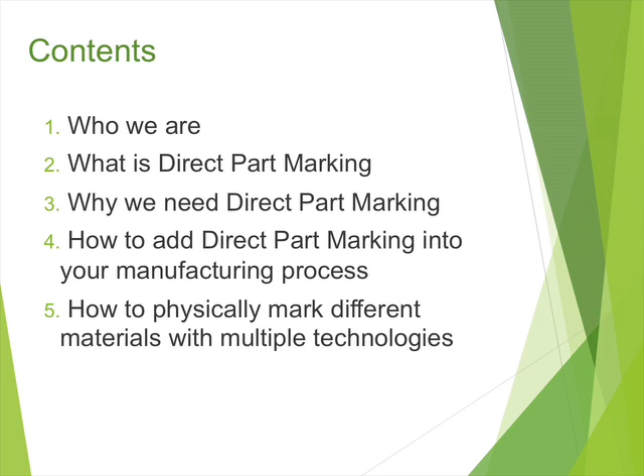Okay, so who is Gravotech? Why are we qualified to educate you on the best practices in marking and traceability? Well, whether you know it or not, every day, everywhere, Gravotech is in your life. You can find us in the engraving on your jewelry, ID numbers in your phone, the VIN number marked on your car, serial numbers on medical devices, and even implants inside someone's body.

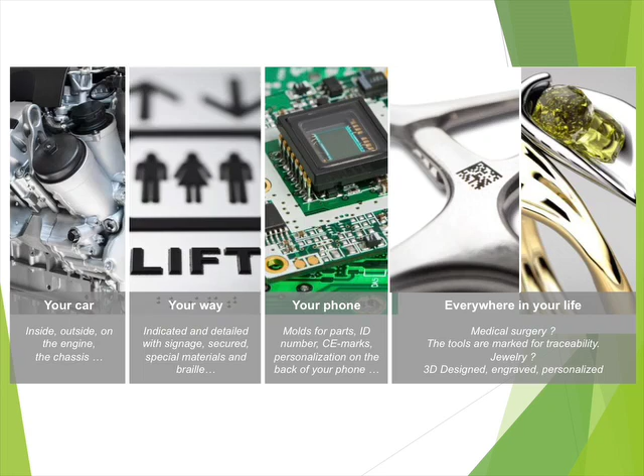How do we do this? Well, Gravotech is built on three outstanding brands. Type 3 is our software brand focusing on 3D artistic CAD/CAM solutions, like designers working on 3D modeling designs for anything from engine parts to jewelry. Gravograph products are focused on rotary engraving machines and benchtop engraving and marking lasers. And Technifor branded products focus on dot-peen, scribing, and the latest laser technologies in the manufacturing market.

These are the solutions most people listening today will be interested in. With over 1,000 employees, Gravotech has offices and distributors in over 100 countries and 3 manufacturing sites in Duluth, Georgia, outside of Atlanta, Troyes, France, near Paris, and Shanghai, China.

So if you're working with a contract manufacturer in another country, you can actually work with Gravotech where you are and design the best marking solution for your product. Then have your overseas factory work with their local Gravotech office to install the marking solution exactly to your specifications.

For example, years ago when I was a product manager for a healthcare manufacturer and distributor, I was working with contract manufacturers in China. We went back and forth with samples and they just couldn't get the right permanent marking solution that we needed. At the time, I didn't know about Gravotech.

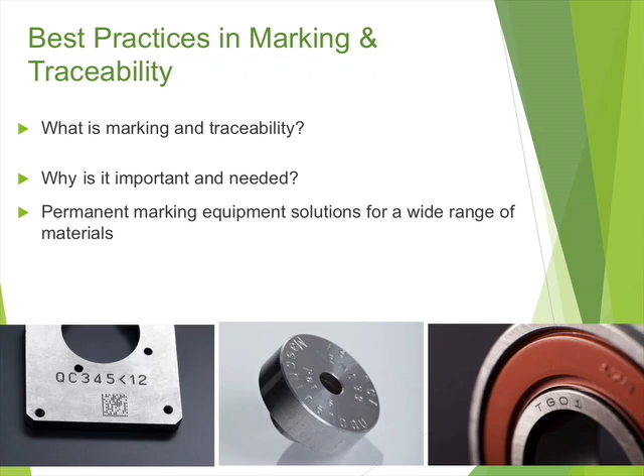Tracking goods can be a tricky business. With component after component being used to make products, how do you keep track of everything? With direct part marking. Direct part marking is the method of marking products directly on the surface during or after the manufacturing process.

Not all methods are permanent and may need to be remarked, costing time and money. For over 78 years, we've tested lots of methods and we recommend 4 technologies: laser, rotary, dot-peen, and scribing.

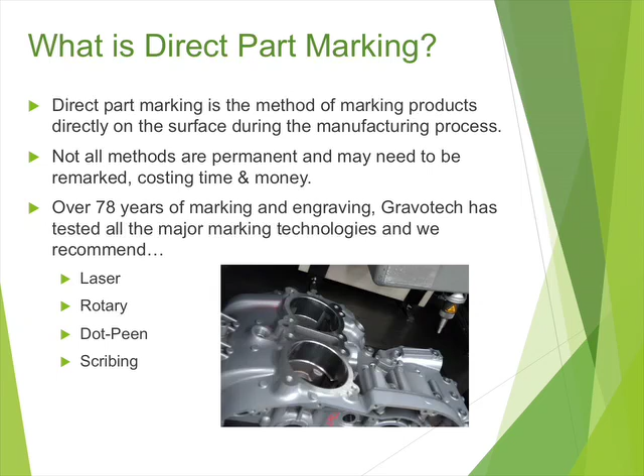Here are some examples of direct part marking. As you can see, the marks are permanently etched into the surface of the part without damaging the surface or affecting the working functionality of the part.

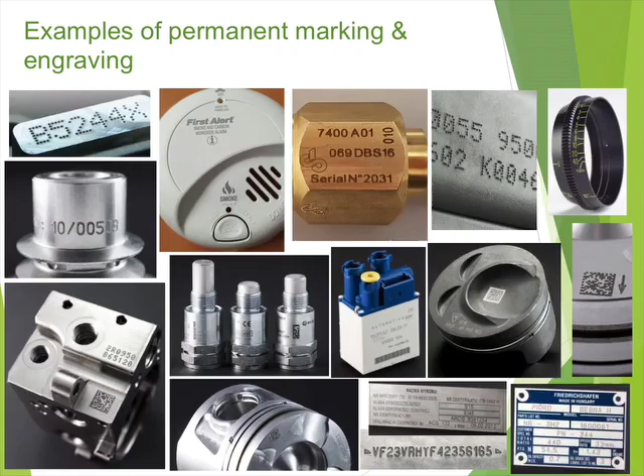Now you may be thinking, direct part marking is nice, but why would I need to spend time and resources marking products? My products are top quality and never fail. That may be true, however, it is driven by much more.

Other industries, like automotive and aerospace, carry enormous amounts of liability that they need to track each and every part to its origin in case of safety malfunctions. Branding and identification allow a company to forever mark their product with a name, logo, date, and more that cannot be removed. Traceability is also benefited by direct part marking because in-process setup and inventory can all be monitored electronically.

All costs are reduced by being able to precisely pinpoint warranty issues and recalls. All of this boils down to providing a competitive advantage for your company.

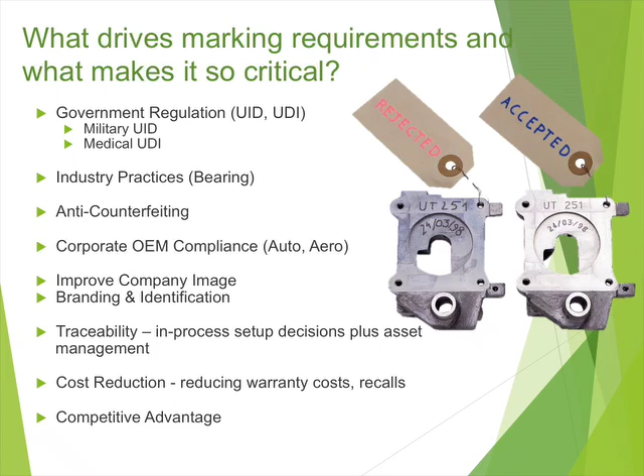Cost reduction is a major consideration for manufacturers to implement marking and traceability. U.S. manufacturers spend more than $25 billion every year on product warranties. Automotive warranty costs alone exceed $9 billion per year.

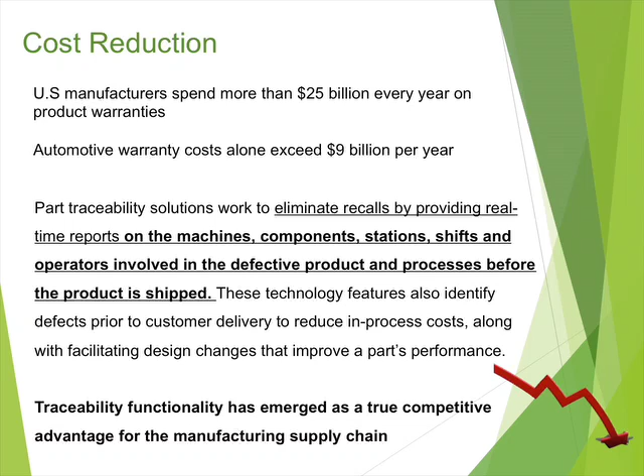Part traceability solutions work to eliminate recalls by providing real-time reports on the machines, components, stations, shifts, and operators involved in the defective product and processes before the product is shipped. This allows for earlier design changes to improve parts performance and reduce in-process costs. Traceability functionality has emerged as a true competitive advantage for the manufacturing supply chain.

There are, of course, both short-term and long-term benefits for implementing marking and traceability. The short-term benefit is to identify products affected by the defect after customer delivery to minimize recall costs. This minimizes the number of products that must be recalled when a manufacturing flaw is found by identifying only the specific serial numbers that were built with the faulty component or material or by the faulty process.

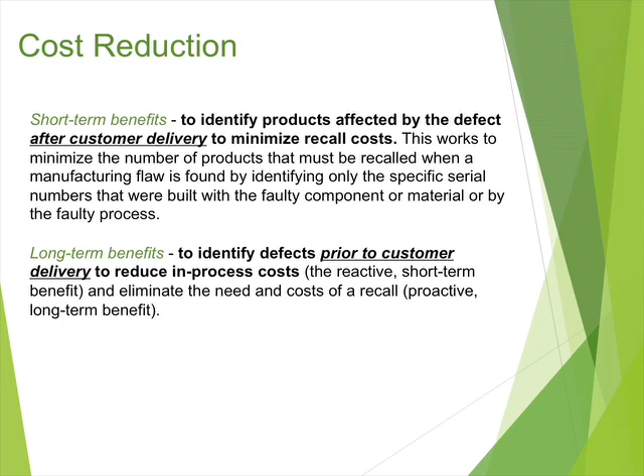The long-term benefit is to identify defects prior to customer delivery and reduce in-process costs and eliminate the need and cost of a recall.

Liability. We live in a litigious society. Liability for manufacturers is a huge consideration. Consumers, customers, government agencies, and courts expect higher quality standards and levels of corporate responsibility. It is up to the manufacturer and supply chain to track their processes and business information so critical safety-related decisions and operations related to warranty issues can be properly analyzed.

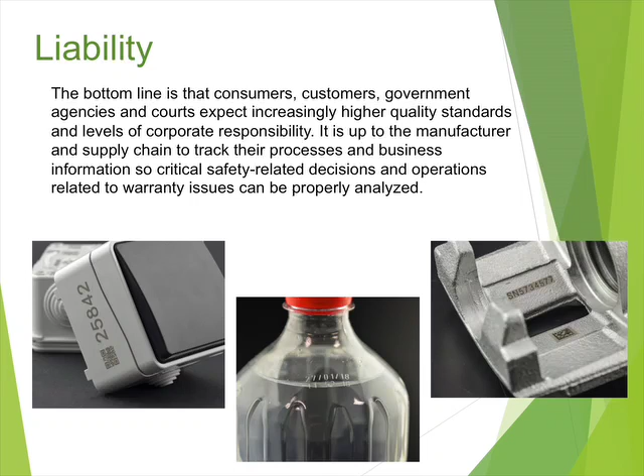If you've ever been involved with a product liability lawsuit, you know the first thing your company's attorney is going to ask you is, did we or someone else make it? How do we know? That leads to another concern for manufacturers: counterfeiting.

Marking and traceability can lower the liability for manufacturers by having a clear and concise history of the part. Manufacturers can add small nuances to their marked parts to easily prove a fake mark from a real mark. Again, this helps you and your attorney answer who made it and if it's yours.

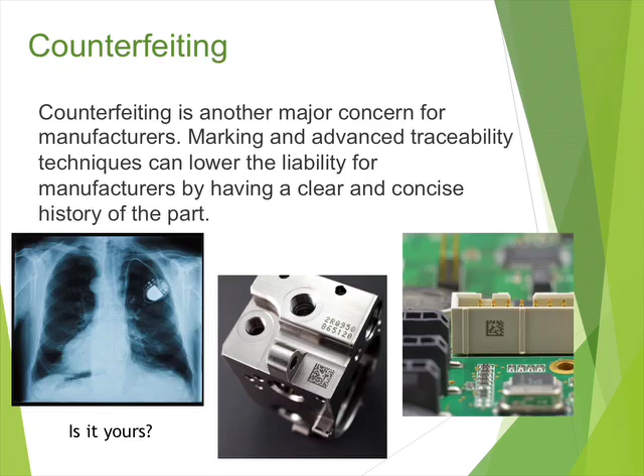In case you didn't know it, $1.77 trillion is spent on counterfeit parts such as brake pads, steering linkages, valves, and more. Here is a counterfeiting example for spark plugs.

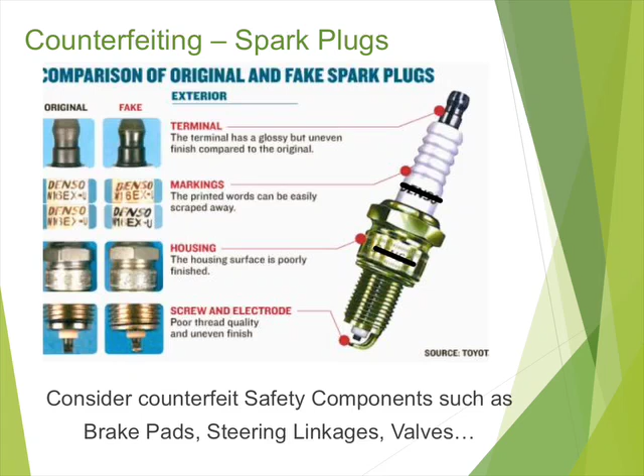A counterfeiter can make a product that looks like yours but is completely inferior and fails. Only permanent direct part marking can prove the fake from the real and make it harder to copy.

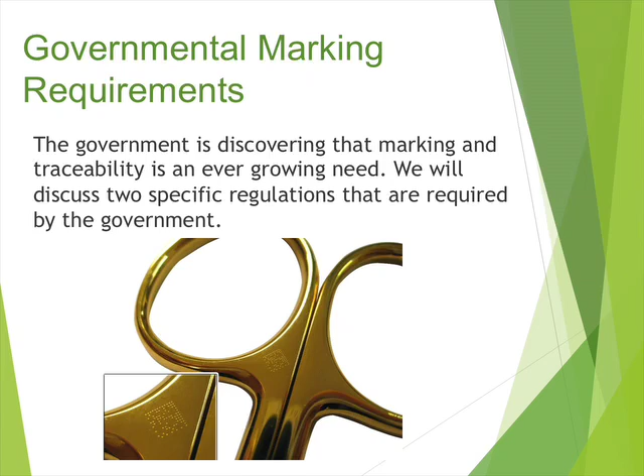Now let's talk about government marking requirements. The government is discovering that marking and traceability is an ever-growing need. We will discuss two specific regulations that are required by the government. The U.S. military requires UID marking. Companies need a partner with extensive knowledge about marking and traceability requirements.

Along with tracking goods for the military, the U.S. government has implemented unique device identification for all medical devices being used in the U.S. For years, there has not been a good system for tracking medical devices.

In 2006, the maker of a surgical clip called Hem-o-lok issued an urgent recall notice warning doctors to stop using the fasteners on living kidney donors. It said the clips could dislodge in their bodies with serious, even life-threatening consequences. Not everyone got the message. A surgeon in Brooklyn used one of the clips to tie off Michael King's renal artery when he donated a kidney to his ailing wife. 12 hours later, the clip popped off. King bled to death internally. He was only 29.

Situations like this can and are being prevented thanks to the new traceability system. By September 24, 2020, all devices will have both human and machine readable codes permanently marked on their surface.

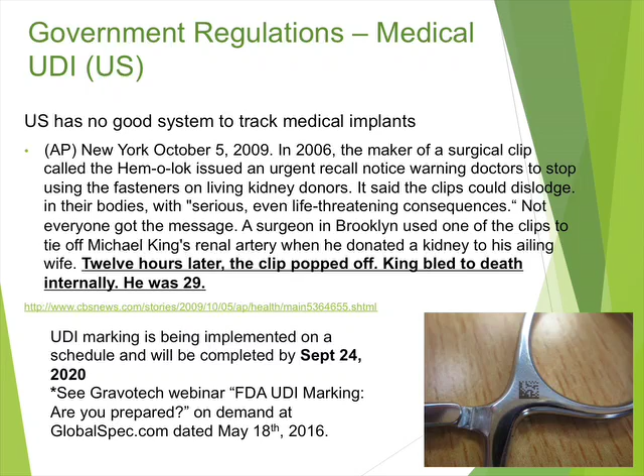So, to integrate or not to integrate? Now that we know why permanent marking is a best practice in manufacturing, let's discuss how it gets done. How do you add marking solutions into your manufacturing facility? Integrate or not to integrate?

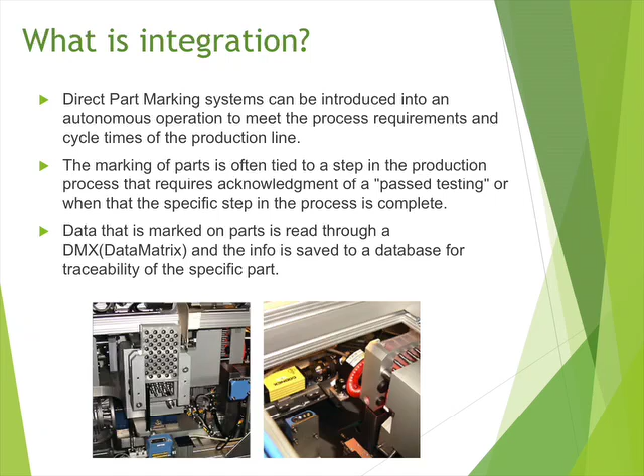What is integration? One of the best practices in marking is direct integration into your production line. Direct part marking systems can be introduced into an autonomous operation to meet the process requirements and cycle times of the production line. The marking of parts is often tied to a step in the production process that requires acknowledgement of a passed testing or when the specific step in the process is complete. The best practice involves data that is marked on parts, is read through a data matrix code, and the info is saved to a database for traceability of that specific part.

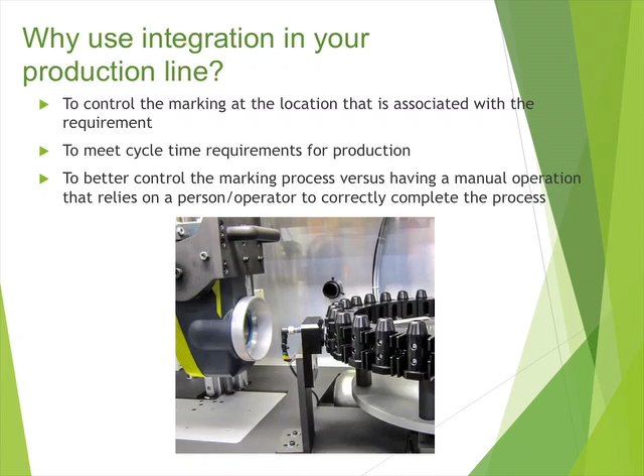So why spend time and money integrating directly into your production line? You can control the marking at the location that is associated with the requirement, easily meet cycle time requirements for production, and better control the marking process versus having a manual operation that relies on a person or an operator to correctly complete the process.

We have a short video overview to explain integrating marking machines into your production line.

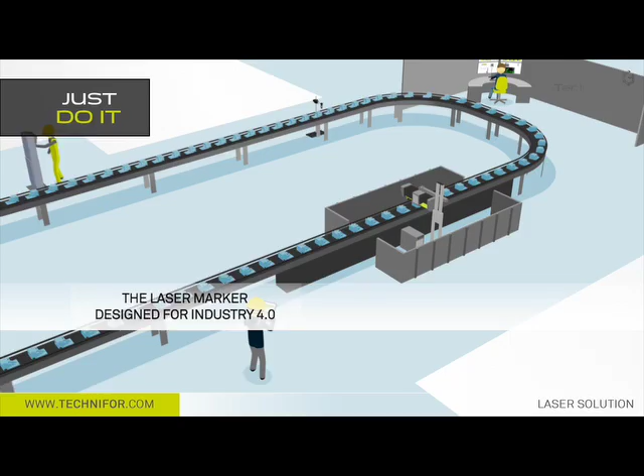So, with any integration, it doesn't come without certain challenges and considerations to create the best solution. By asking yourself a few questions, it makes the process simple. What is the physical area available for the marking equipment at the location required in the production line? How will the part be presented to the marking system and then taken to the next step in production? Also consider part handling, manipulation, and holding of the part. How will the marking system communicate from the production line PLC or other company databases and control system?

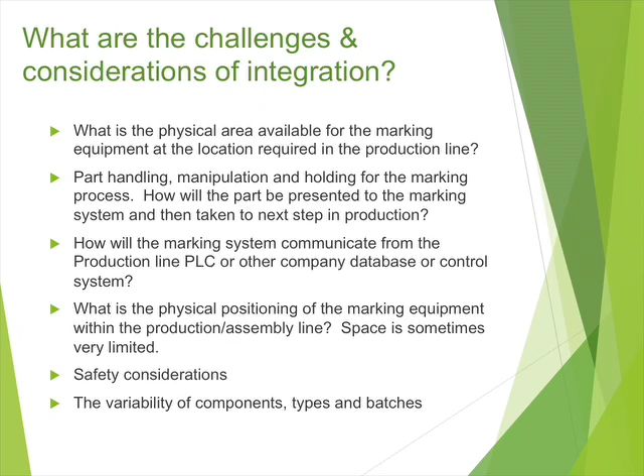What is the physical positioning of the marking equipment within the production assembly line? Space is sometimes very limited. Safety considerations are of course important, and the variability of components, types, and batches. Best practice to help answer these questions is to consult with a permanent marking specialist.

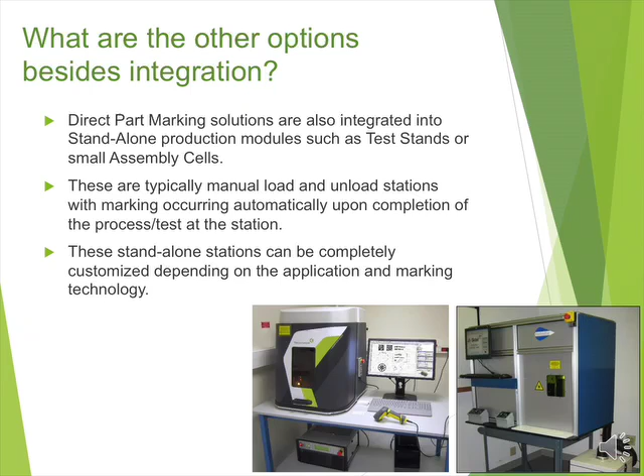What are the other options besides integration? If you have answered those questions and integration does not work with your process, you can always add a separate standalone marking station. These are typically manual load and unload stations with marking occurring automatically upon completion of the process or a test at the station. These standalone stations can be completely customized depending on the application and marking technology used. Again, the best practice is to have an experienced permanent marking specialist design a solution for you.

Now let's talk about how to physically mark the product. Even though we recommend 4 specific marking technologies, that doesn't mean they are the only methods available. A few others include hand marking, which is easy to implement but slow and inconsistent. It's also labor intensive, and when a hammer smashes a thumb, it can be expensive.

Inkjet application is fast and programmable, but it's not permanent and can be removed. Ink is not cheap, and the solvent is an environmental liability. Presses can make fast permanent marks, but they're not very flexible and setup is time consuming. They can't be used on hard or fragile parts, and they can be dangerous. And a chemical etch is inexpensive, but slow and inconsistent. Plus, it also has environmental waste as well.

For all the reasons mentioned above, we do not feel these marking methods are considered best practices in marking. Now, if you're currently using one of these methods and it's working for you, that's just fine.

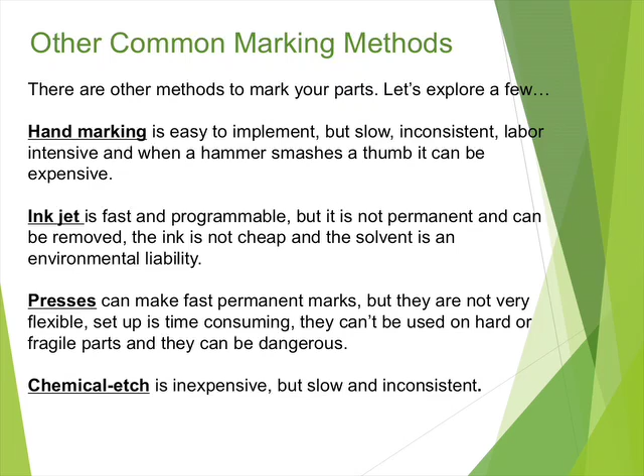Best permanent marking methods. Gravotech recommends the following methods as best practices in permanent marking: pneumatic dot-peen micropercussion, electromagnetic dot-peen micropercussion, scribing, and 4 different laser types including fiber, green, CO2, and a hybrid. Mark and Read is also a technology that allows barcodes and other 2D codes to be read by software systems.

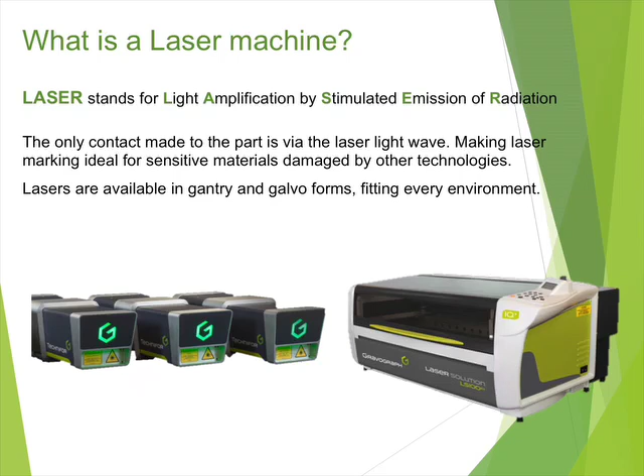So how do you choose which technology works best for your manufacturing process? Let's explore lasers. Laser stands for light amplification by stimulated emission of radiation. The only contact made to the part is by the laser light wave, making it ideal for sensitive materials damaged by other technologies. Lasers are compatible with a wide variety of materials, including glass, wood, ceramic, metal, plastic, and many more. 4 different types of lasers are manufactured by Gravotech and will be discussed shortly. Lasers are available in gantry and galvo forms, fitting every environment.

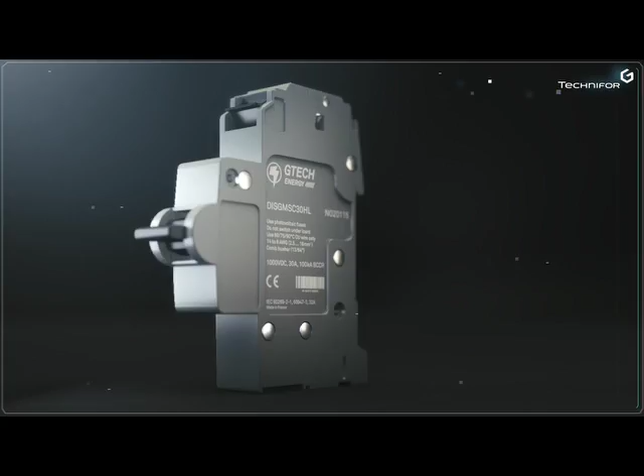This video will show you a few different marking options when it comes to lasers. First, we have direct part marking. The laser etches a mark onto the surface of a device, leaving behind a small, highly contrasted mark readable by both humans and machines. Second, we have a device that does not have a clean surface but still requires a mark. The laser cleans the surface and then creates the permanent and direct mark.

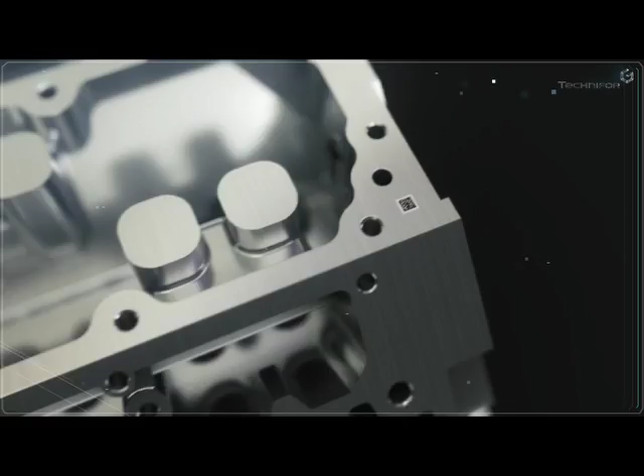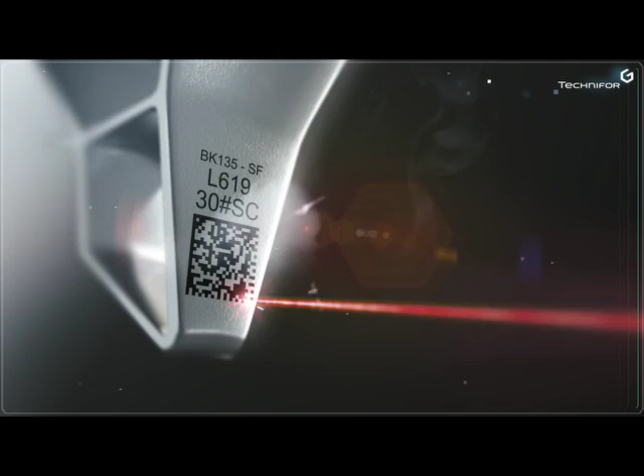Third, we can take an entire layer of material off a device. This type of marking is great for engraving aluminum rating plates, where a contrasting color is left on the tag, making it very easy to read. Fourth, we can create a black mark on a device surface. This type of mark is great for smaller component pieces where it can be difficult to spot the identification mark.

Finally, we have deep engraving. This is where a large portion of material is removed to create a 3D product. This is typically reserved for intricate details or a production mold.

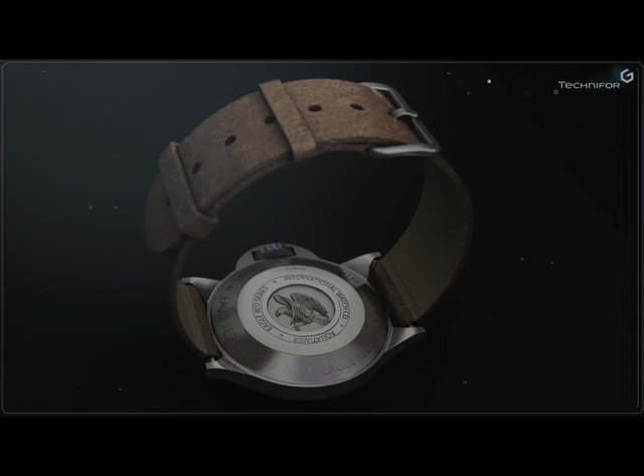The CO2 laser is the first solution we will discuss. A CO2 laser is very popular for use with organic materials, including wood, rubber, leather, minerals such as glass, ceramic, and more. The CO2 laser is capable of working with transparent plastics and covered metals. This particular laser is available in two versions, gantry and galvo. A gantry laser moves the laser optics along the x-axis over the top of the product.

The laser is contained within a safe, Class 1 cabinet, allowing it to be used anywhere, even in a storefront. There are 6 standard sizes and over 25 different power levels in the gantry version. The galvo version is a stationary laser that can be integrated in multiple positions with extremely fast cycle times. Respectful of the environment, its operation is clean, without ink deposits or solvent emissions. Its operating costs are minimal due to the lack of consumables or maintenance. This laser solution also helps reduce your carbon footprint.

One of the most exciting features is the new on-the-fly marking with the galvo range. This range identifies stationary or moving parts while maintaining constant marking quality. This traceability solution offers high speed, readable, and permanent marking.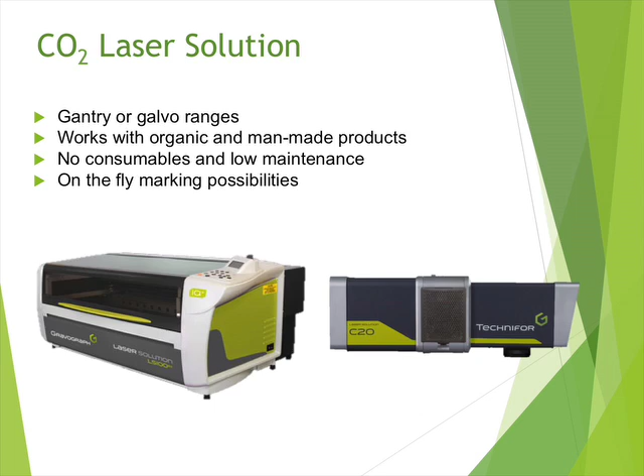Here's a list of materials marked with CO2 lasers. In the case of uncoated stainless steel and brass, CO2 is not the best laser, but when a product called Cermark is applied first to the surface, it will leave a nice readable mark.

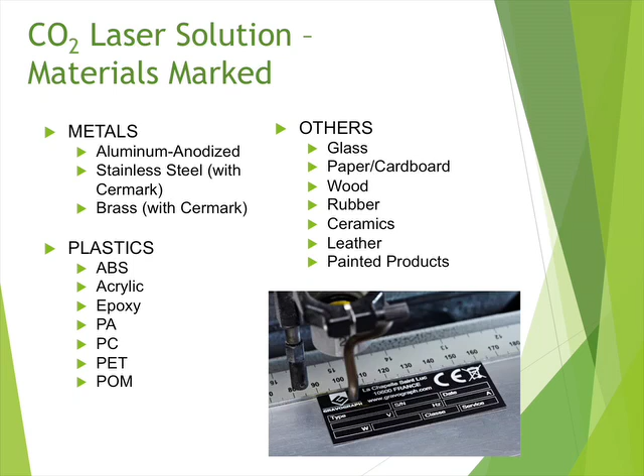In this short video, we can see how fast a CO2 galvo laser can mark. First, we will look at some 2-ply plastic. The red laser gives a preview area for where the mark will be placed, and then it's marked by the CO2 laser. Don't blink or you'll miss it. As you can see, it is extremely fast and produces a high-resolution mark easily read by both humans and machines.

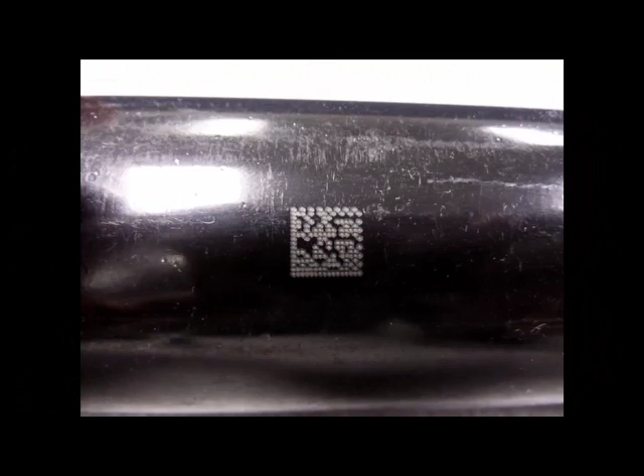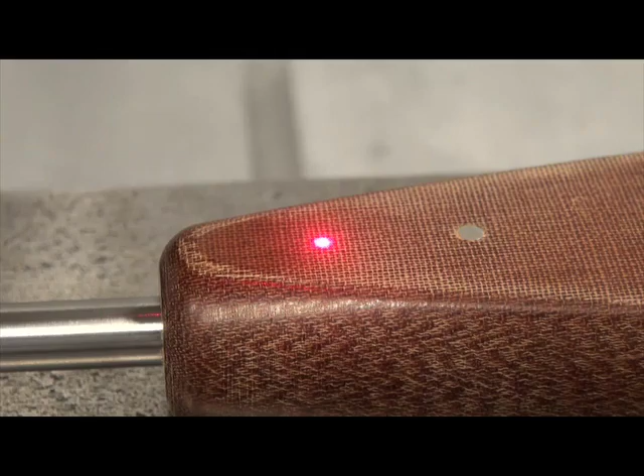The next material is a painted metal tube. The mark needs to follow the curvature of the surface while marking deep enough to go through the paint to the metal surface. Lastly, we have a wooden handle screwdriver. The mark is lined up and finished. As you can see, the mark is applied quickly and with ease.

Next are fiber lasers from Gravotech, available in both galvo and gantry versions like the CO2 laser range. Fiber lasers are the ideal solution for small spaces, so you can easily integrate marking into your production. On a line or robotic arm, it is simple to install in all positions, considerably reducing installation time and cost. Very durable, it is sealed from dust and water splashes in the most harsh environments.

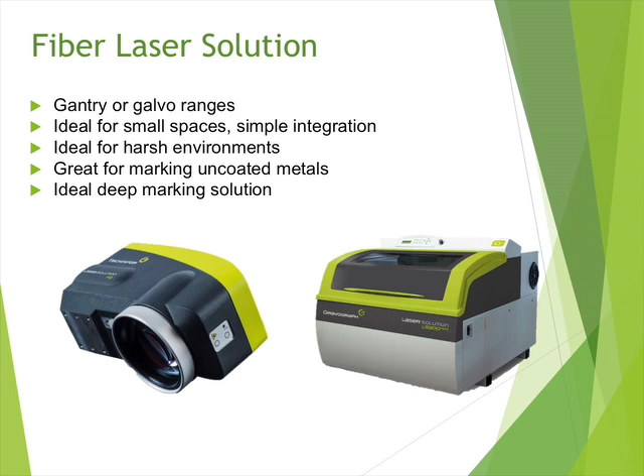The fiber laser works with a wide variety of products, but has a particularly positive effect on uncoated metals. It produces a high-resolution black mark that is easily seen by both machines and humans. Deep marking is easily achieved with the F50 series. Produce identification marks that are tamper-proof and stand up against many manufacturing processes. Here's a list of materials that can be marked by fiber lasers.

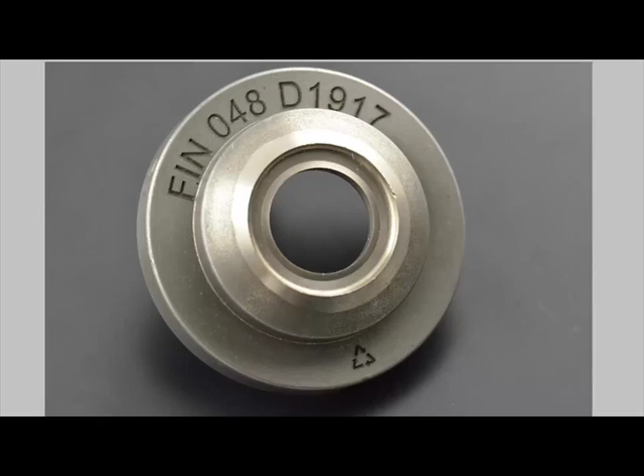In this video, we will see how a fiber laser can produce very deep marks on a circular metal part. This is the part we are going to engrave. It is steel that needs to be deeply marked around the top circumference. As you can see, the fiber laser cuts into the material like butter to produce a deep mark that can withstand painting, sanding, washing, and more.

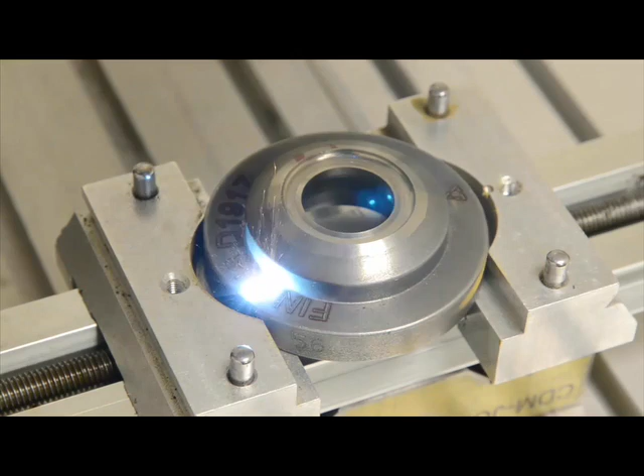The green laser is a new innovation from Gravotech. It utilizes a type of marking called cold marking. Cold marking applies minimal heat to the product, which reduces mechanical stress and distortion to the parts.

The green laser can also create extremely small, high-resolution marks to work with the smallest of sensitive components. Copper, silver, gold, and plastic are a few of the materials that react well with this particular laser. This range uses a 532 nanometer wavelength to mark materials not reacting to infrared wavelengths. And here's a list of materials suitable for green lasers.

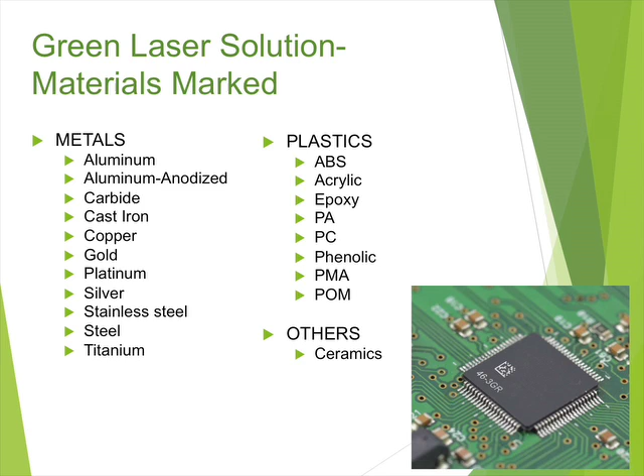The hybrid is also a new innovation from Gravotech. Contrasted, discreet, deep, or surface marking, the possible effects are numerous. The extensive frequency range means marking can be adapted to each application and any type of material.

The hybrid solution is a compact and independent turnkey system. Its all-in-one design is secure, easy to install, and free from wiring constraints. Installation is simple with only a single cable.

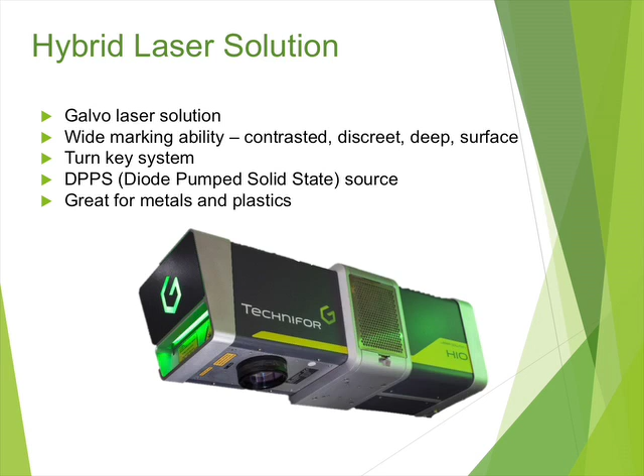New all-in-one Technifor lasers from Gravotech are easier to integrate and connect to current operating systems.

Cognex cameras are a new innovation from Gravotech. The Cognex camera is a system that allows the reading of a mark directly after the mark has been applied. This allows the operator to confirm the mark is accurate and contains all the necessary information. Because what good is a mark if you can't read it? We saw this demonstrated in the integration video we saw earlier.

Gravotech also manufactures a 3D module accessory where the laser can mark different levels of the same part without repositioning the laser itself. Another great innovation from Gravotech is the autofocus ability. Autofocus is an accessory for laser machines that allows you to mark parts on a production line of varying heights without delaying progress. This is key to keeping a production line moving efficiently.

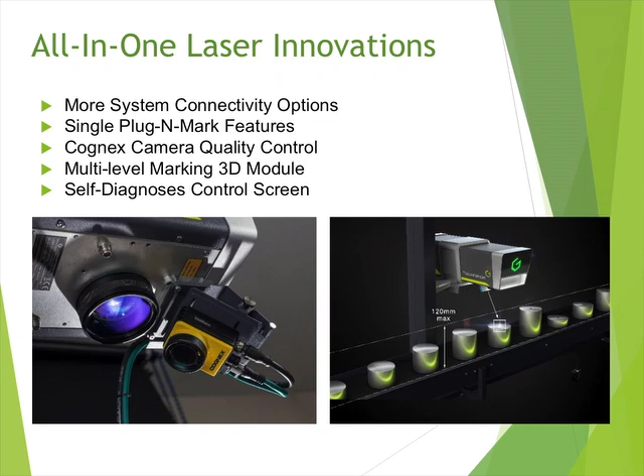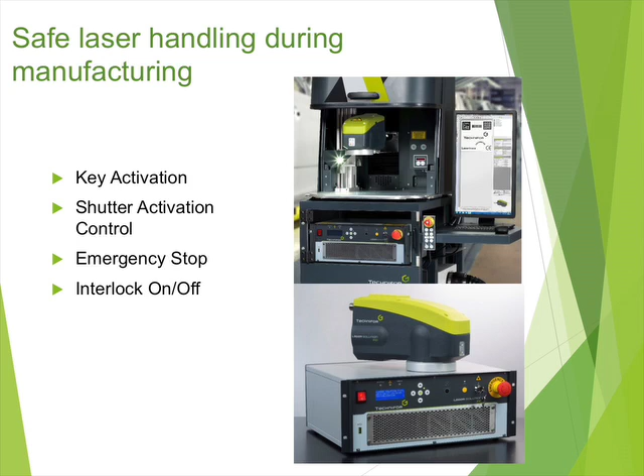Gravotech lasers also have the ability to self-diagnose problems directly from the control screen. Data is displayed in real time directly on the laser machine, regardless of whether it operates independently or connected to your environment. Be sure your laser systems have important safety features such as key to activate, shutter open-close to deactivate the laser, an emergency stop, and an interlock to control on-off functions.

Now that we've talked about different lasers, let's talk about different mechanical marking machines. Rotary engraving and cutting is another very popular form of marking. Rotary engraving is a term used to describe engraving done with a rotary cutting tool in a motorized spindle. The tool, or cutter, cuts into the surface of the material to a predetermined depth and produces a groove of the same shape and dimension of the cutter.

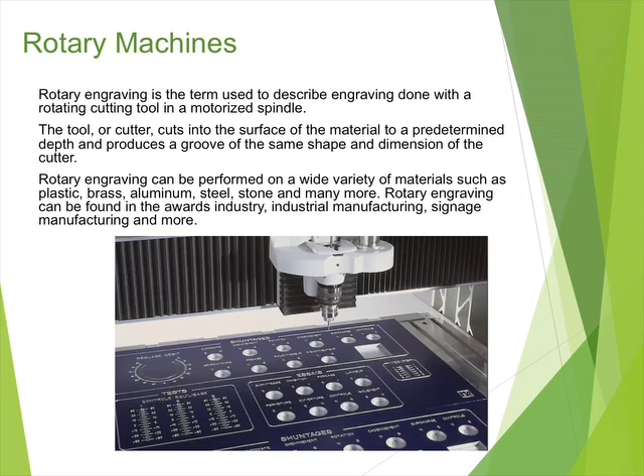Rotary engraving can be performed on a wide variety of materials from plastic, brass, aluminum, and more. Rotary engraving can be found in the awards industry, industrial manufacturing, signage manufacturing, and more. In this quick video, you can see a variety of materials and intricate work you can perform with a rotary machine.

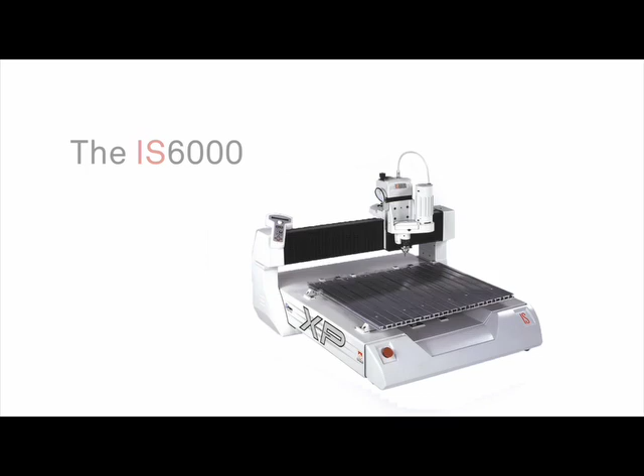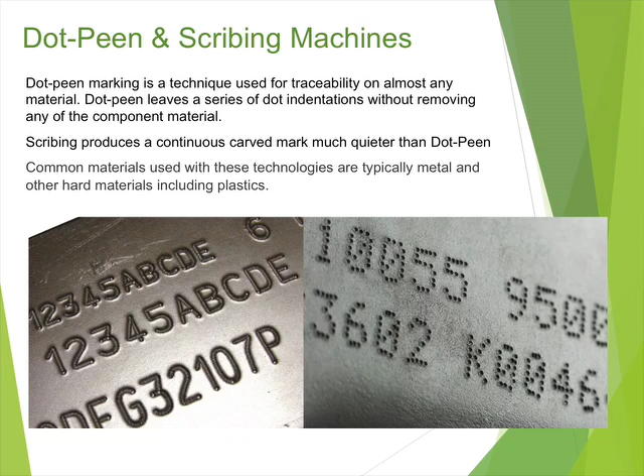Dot-peen and scribing are the remaining two direct part marking methods we recommend. Dot-peen marking is a technique used for traceability on almost any material. Dot-peen leaves a series of dot indentations without removing any of the component material. Scribing produces a continuous carved mark and is much quieter than dot-peen machines. The common materials used with these technologies are typically metal and other hard materials. Since this machine requires a hard strike to the surface of a part, it is not recommended for sensitive and delicate parts. You may have seen this technology commonly used for automobile VIN numbers.

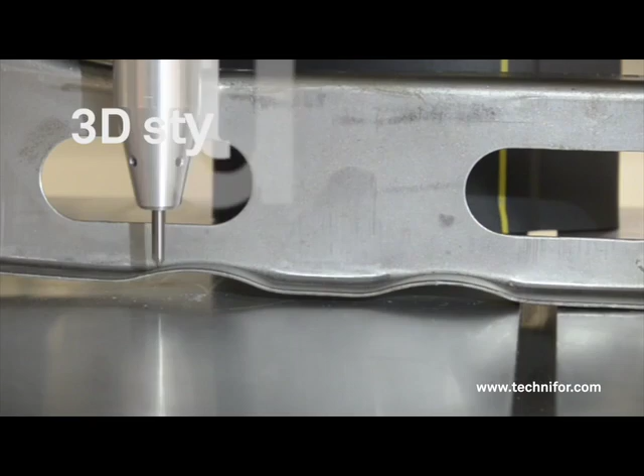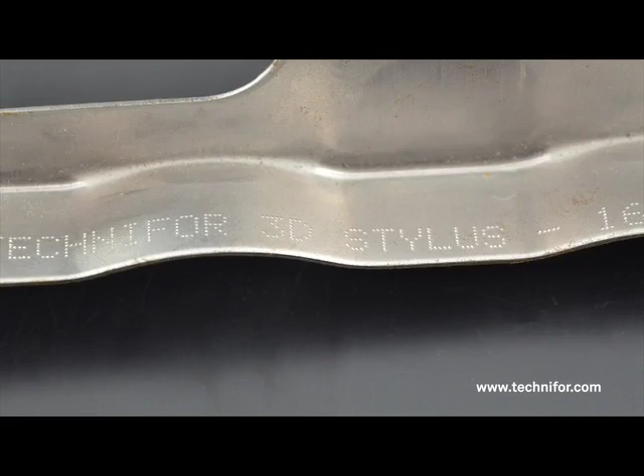In this video, we demonstrate how a dot-peen machine works. This particular video also shows one of our latest innovations, the 3D stylus. A normal dot-peen machine can only mark on a flat surface, but the 3D stylus can do much more and does not require extra accessories like a rotary device. You can mark a single part with a varying height from 2 millimeters up to 18 millimeters.

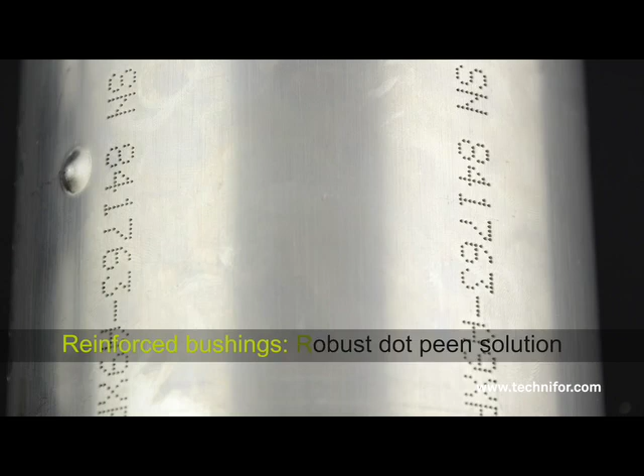Custom solutions. Not all off-the-shelf solutions work for every situation. Gravotech can create a custom solution to fit any need.

In this example, a laser was installed onto a compartment to mark a particular component for an oven. The oven part is moved along the conveyor under the marking area to ensure the entire piece is fully marked.

Another example was for a small rotary machine to be added to a cosmetic store. The machine needed to be contained within a safety enclosure to prevent untrained individuals access to the machine. We also created custom, picture-driven software to easily engrave in 5 steps. Everyone's needs are different, and Gravotech can find a solution for every need.

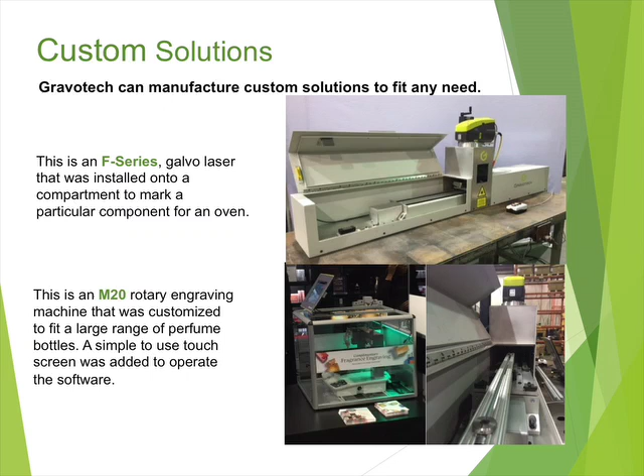Galvo lasers can be enclosed in many different forms to create standalone stations. Here you can see a few different enclosures we have custom manufactured for our customers. As you can see in the top right image, there is no enclosure. This is because the room has been secured and the operator is wearing special laser safety glasses. It all depends on the need of the customer.

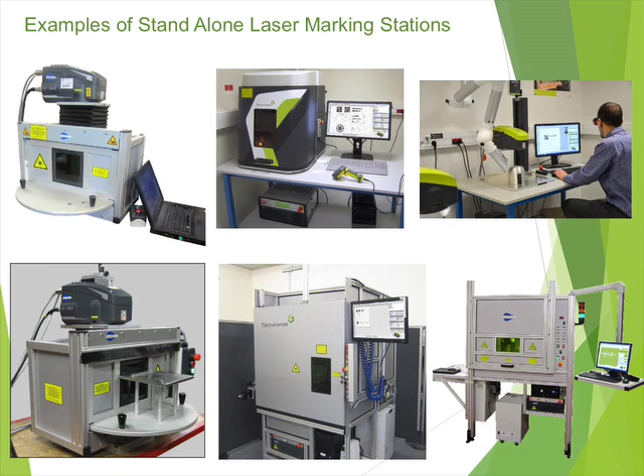These images are sections of production lines that house laser solutions to mark parts. Each laser is safely contained within its own custom enclosure. A new invention is the Class 1 nose cone, as shown in the bottom right image. This nose cone allows the laser beam to be contained without the use of a large enclosure. This is ideal for small, tight spaces.

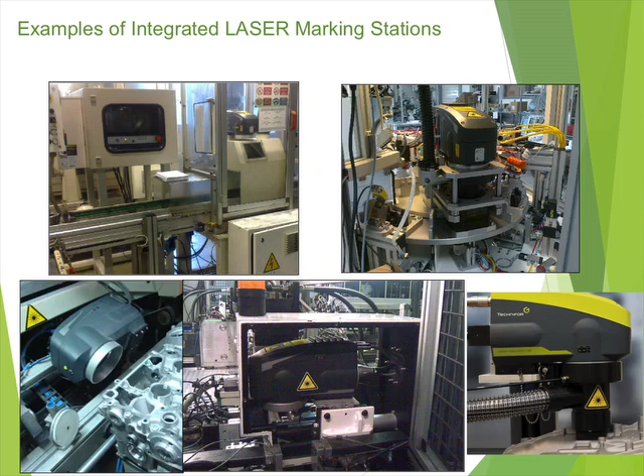Along with the machines to physically mark the parts, you'll need a software solution to drive the machine. Gravostyle 8 drives gantry and rotary machines and has been optimized to handle industrial operations as well as 3D engraving.

Lasertrace is used to drive Galvo lasers. This software has functions specifically dedicated to traceability and automation.

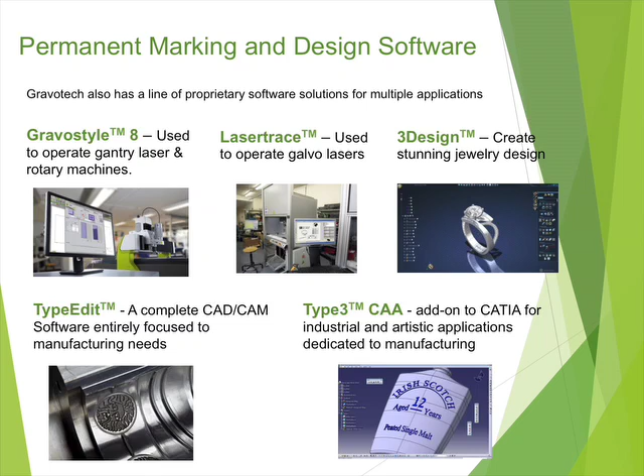3Design is a tool used by many to create custom jewelry designs and renderings. TypeEdit is a complete CAD/CAM software focused on manufacturing needs. And lastly, Type3 CAA is an add-on to CATIA for industrial and artistic applications dedicated to manufacturing designs.

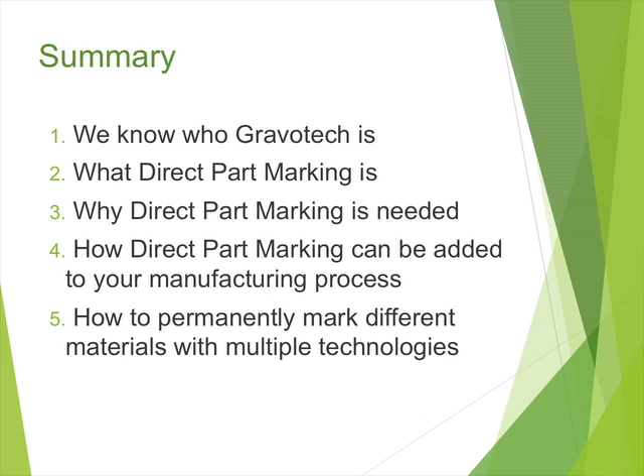In summary, we learned: we know who Gravotech is, what direct part marking is, why direct part marking is needed, how direct part marking can be added to your manufacturing process, and how to permanently mark different materials with multiple technologies. Thank you very much for attending our webinar today.